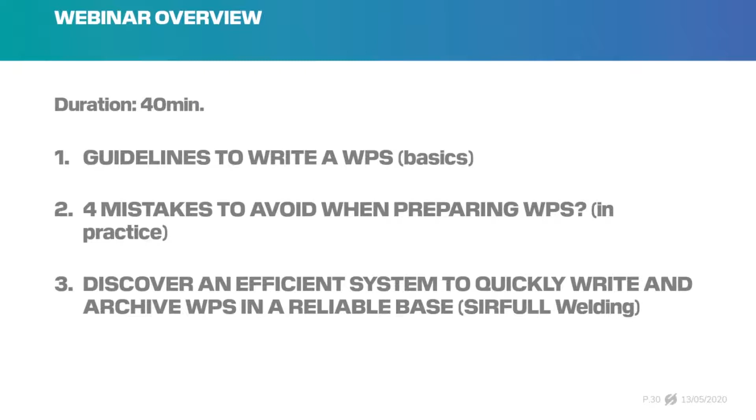Okay, we've got a plan for this webinar. It is divided into 3 parts: you will get guidelines to write your WPS, 4 mistakes to avoid when preparing WPS practice, and finally we will discover an efficient system to quickly write and archive WPS in a reliable base, Sirfull Welding, of course. Finally, on the same page, let's go.

So, just checking if everyone is here. Okay.

Firstly, not everyone in the assembly has the same level of knowledge of the subject, so I prefer to cover a few basics. A WPS is a welding procedure specification, and it is the formal written document describing welding procedures, which provides direction to the welder or welding operators for making sound and quality production welds as per code requirements. The purpose of the document is to guide welders to the accepted procedures so that repeatable and trusted welding techniques are used.

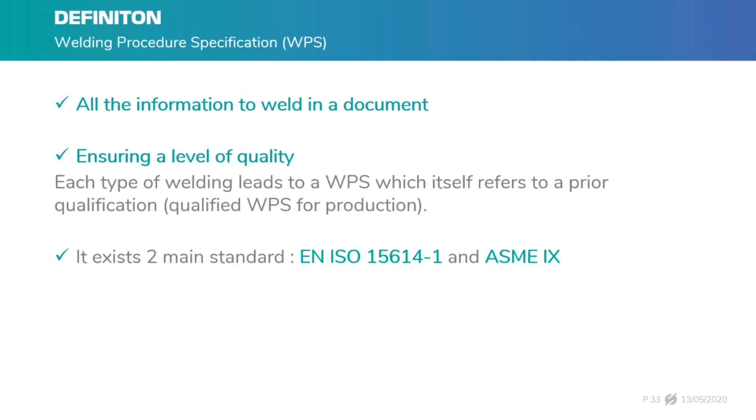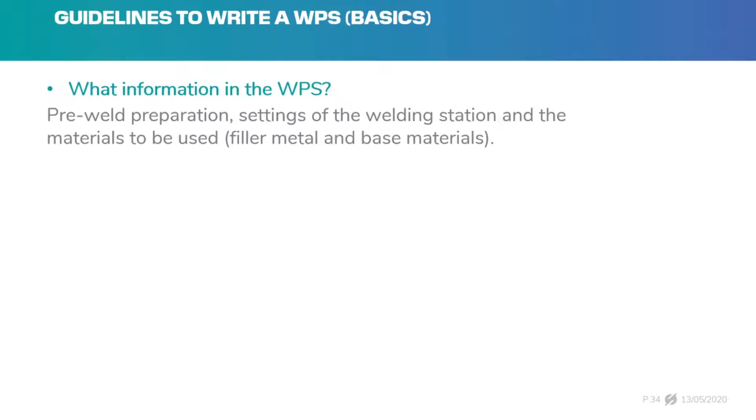There exist two main norms, the EN ISO for the European system and ASME 9 for the American one. I think a lot of people in the room know that. The WPS is a guiding document for the welding coordinator, the welder and inspector during the execution and follow-up of the welding joints. And of course, the WPS is a mandatory document and must be present during a welding procedure qualification and welding personnel qualification. So that's the basics.

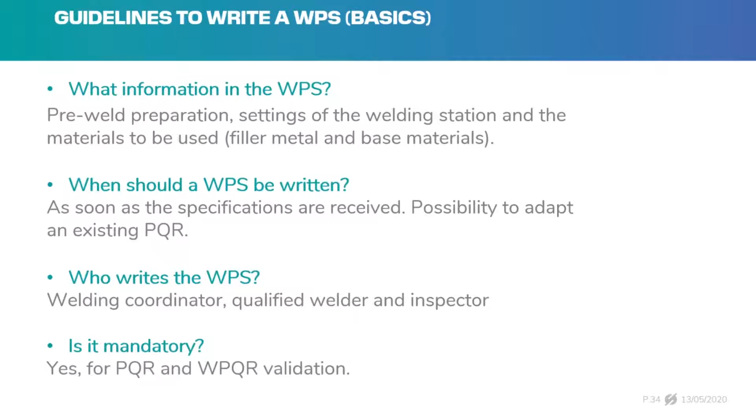You can reread these guidelines when I send you the presentation by email. And when we speak about WPS, it's really important to know the difference between a WPS and a PWPS. So what are we talking about?

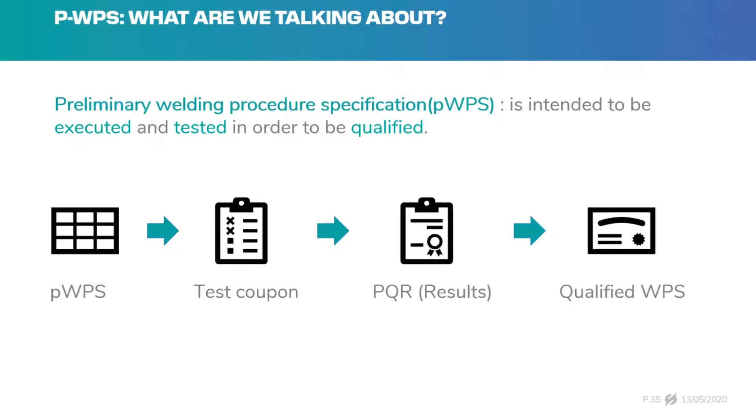The PWPS is a supporting document that endorses the actual PQR, which is the procedure qualification record, the official PQR, lab test report, NDT report, and the official WPS. Because in PWPS, the P is for preliminary. So the PWPS serves as the basis for a PQR required for the certification of a WPS through an inspection body. I know there are some differences between the European and American systems when it comes to interventions of certification bodies, but we will not cover this part in this webinar. The thing is, I just want to tell you the difference between PWPS, WPS, PQR, and what's going on between them.

And for those in the room that don't know what a PQR is for the moment, this is the official document coming from the official form as presented in ASME 9. Okay, we are still together. Okay, I can continue.

So on the screen, I will project all the steps to prepare a PWPS and PQR. After that, we will be able to identify what's going wrong around WPS edition, writing, and welding reporting, and what an automated system can do for you. But first, all we need to identify is the welding process which is to be used.

First of all, we need to identify the welding process which is to be used. This is the first part before writing a PWPS. Welding processes include SMAW or GMAW, GTAW, etc. And once the welding process is decided, then we need to see the corresponding table.

That table is QW252 and QW269 for the complete list of variables. With the help of the table, we can list out all the necessary variables to be used in our WPS. Once we have the minimum variables - essential, non-essential, and supplementary variables, these are terms we find in ASME 9, but not in EN ISO 15614.

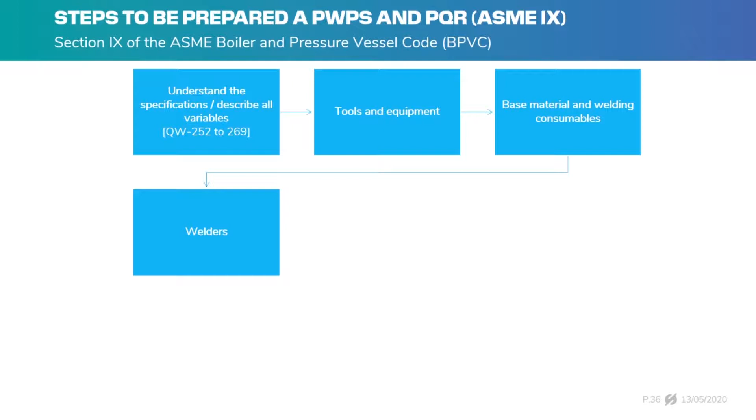Once the minimum variables are decided, a preliminary WPS is prepared. Just give me a few seconds... Okay, everything is on your screen right now.

Based on the proposed WPS, a test coupon is prepared and welded as per the values provided in the PWPS. All the real-time data are recorded. After successful welding, the test coupon is subject to destructive tests.

If the test coupon meets the minimum code requirement, the same PWPS is finalized and approved for further job. In case of any change, the same procedure is repeated until the test coupon meets the minimum code requirement.

As before, all the real-time data during welding of the test coupon and the destructive test report data is compiled into one document known as the Procedure Qualification Record. After successful preparation of the PQR, the final WPS is prepared and produced to the authorized welding inspector for final approval.

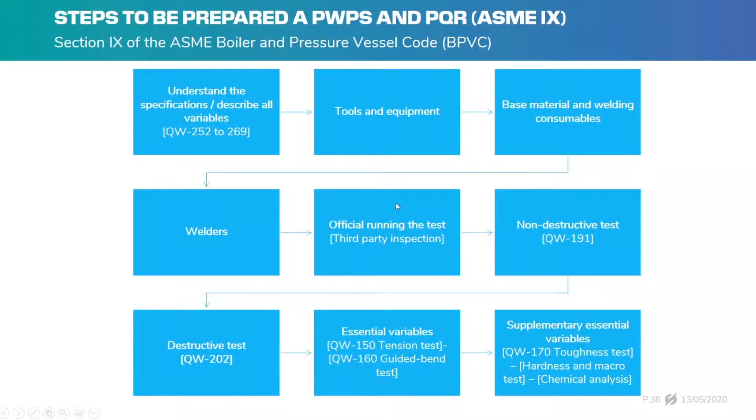And that's how we made a WPS. We don't have time to go more in depth into this, but I think we got the main ideas. This is a form, a WPS.

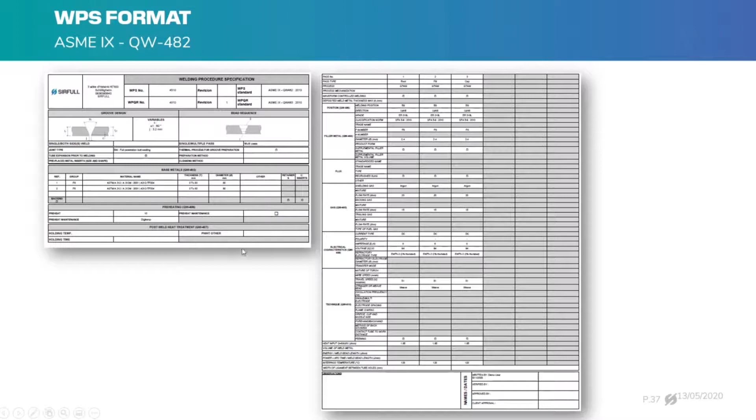This is in ASME 9, created with Sirfull Welding, and this is the official document we've got. But this is all we are going to see for the moment.

Just to finish this first part of the webinar, I'd like to give you a bonus: a very useful link I found on the internet with all the EN ISO WPS format and all the relative norms around WPS.

So if you are not used to the European standard, this document is really useful if you want to know all the norms that gravitate around the WPS.

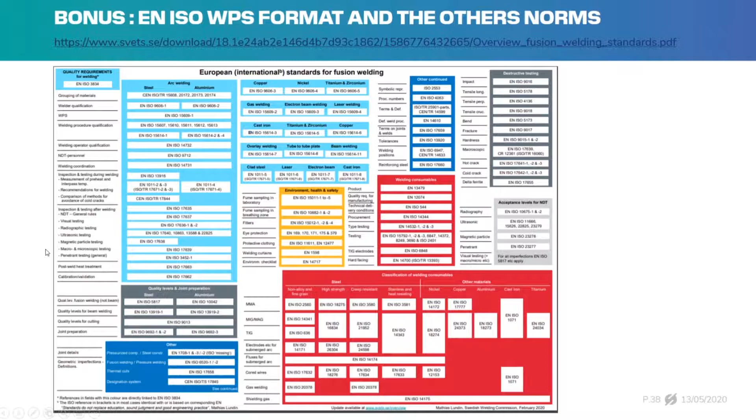So let's go for the next part: 4 mistakes to avoid when preparing WPS, and why it is so difficult for a manufacturer to write WPS. Just give me a few minutes to explain my point.

My point here is to consider the importance of the effort you spend on your thickness range interpretation. The purpose of this task is to exploit the full potential of your qualification, meaning editing the maximum amount of WPS you can with regard to your qualified thickness range.

Let me explain. In the last chapter, we saw together that you, the manufacturer, must follow a clear workflow to obtain a PQR. The variables and tests used for your qualification are recorded on the PQR.

At this point, we have a thickness limit. This means the WPS is qualified for a thickness range, and if we have to weld beyond this thickness range, we need a new WPS and a procedure qualification.

Sometimes there are cases of non-essential variables, and a new WPS can be written freely. So now you can write qualified WPS to support the welds you need to make. The qualified range, or the thickness range, helps you do that.

So let's take an example. From the above example, you can easily find out the thickness range for which a PWPS can be qualified, or a welding engineer can prepare a WPS accordingly.

And this is a thickness qualification table example. And just a remark aside.

Sorry, we got someone else in the room. Sorry, I can continue right now.

So, remark aside: one important point to be noted is that for performance qualification or welder qualification, the thickness considered is that of the deposited weld metal. But in case of procedure qualification, it is the thickness of the test coupon which is considered.

My conclusion is that in practice, this task must be put into perspective with the time constraints encountered by the welding coordinator in the company.

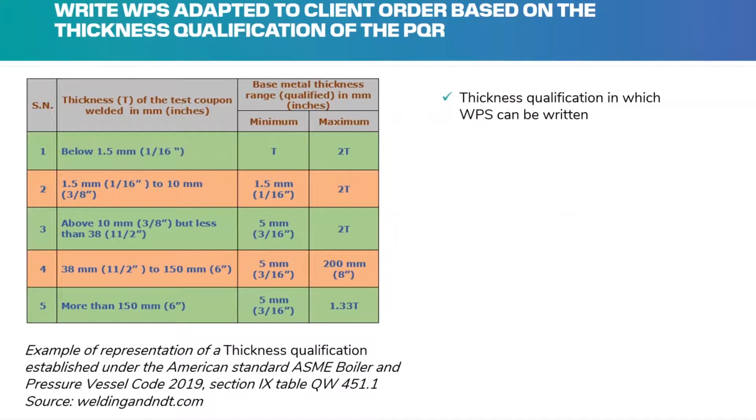What I want to explain is that sometimes the welding engineer or the welding coordinator don't have time to create all this documentation, because you've got a lot of work to do here and here. This type of work cannot be automated, but this part can be automated.

And that leads us to the next part, a really important part of the presentation: right now, at what limits can this process be problematic? I know individual experiences may vary in the management of WPS or welding quality management.

Your WPS can be written with regard to the process type, the assembly type, the position, the grade, group thickness, etc. That is why an internal codification can also be set up to help harmonize your company's WPS library.

Your WPS library is updated as the client orders are received. Go back here, because you need to archive all this documentation, this one, per customer.

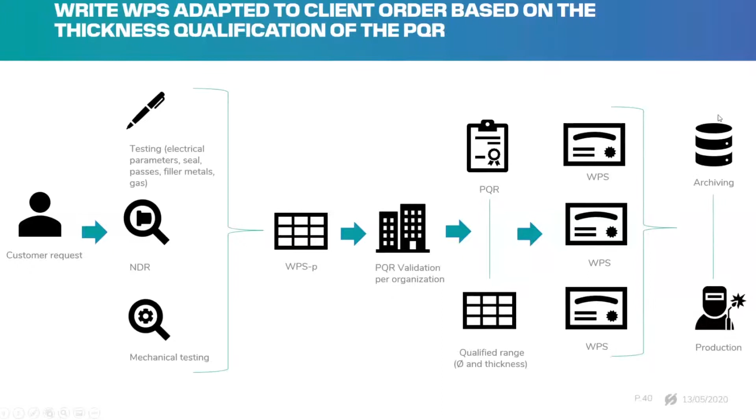The questions that then arise are: what tools will you use to write your WPS? Is it Excel to help interpret the qualified range and edit WPS, or perhaps Word for the layout? Do you intend to systematically fill or manually enter your WPS document, knowing that many WPS cells are redundant, like position, group commercial names, or filler metals denomination? And what will be the WPS reference archive mode you will use?

Paper-based or files on a local server? How will this database be accessible, and who will be able to use and update it? Moreover, how will the updates, verification, and approval of these documents be traced? I think you've got the point here. The challenge is to have an efficient system to quickly find your existing WPS in a reliable database.

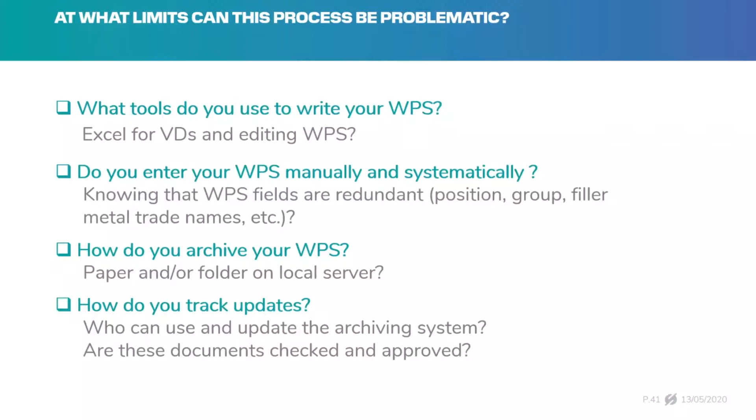So the WPS are only part of the welding reporting, and the complete construction of the welding data book and manufacturer files is complicated. This is just a quick overview of what a coordinator or welding engineer needs to do to compile a manufacturer data book report. WPS and PQR management is just one part. You need to find an equipment plan, do the weld mapping, find all the norms, do the NDT reports, find all the materials and consumable certificates, know the heat treatments, and compile the document.

I just tried to do a quick joke, but it failed just before. How long have you been welding? Ten years. I guess welding quality reporting turned out to be easy for you, right?

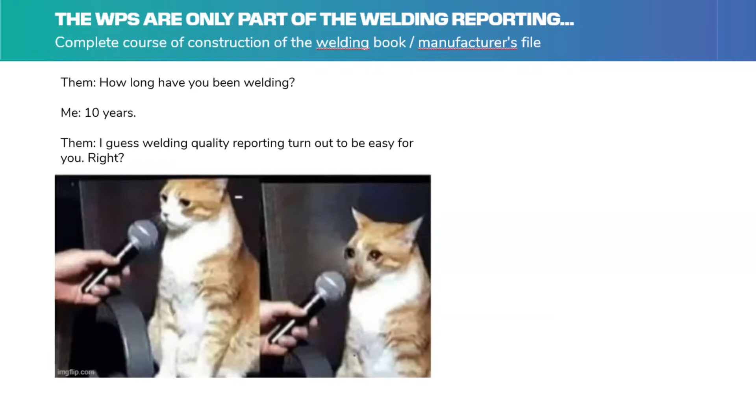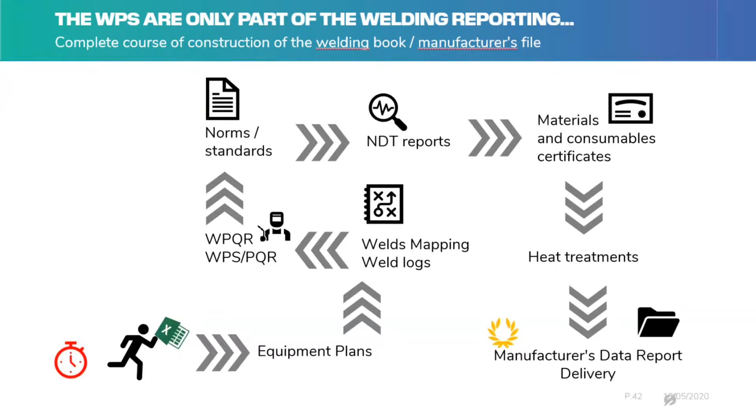What I just want to express with this meme is that it's still complicated in 2022 to deal with welding quality documentation, because it's so difficult to do the main part of the job, like PWPS management, test coupons, etc. So the risk here, my point here, is that there is a stage where you won't go any faster, and the reality of the practice will lead you to regulatory non-compliance, delay, and under-optimized and superfluous PQR.

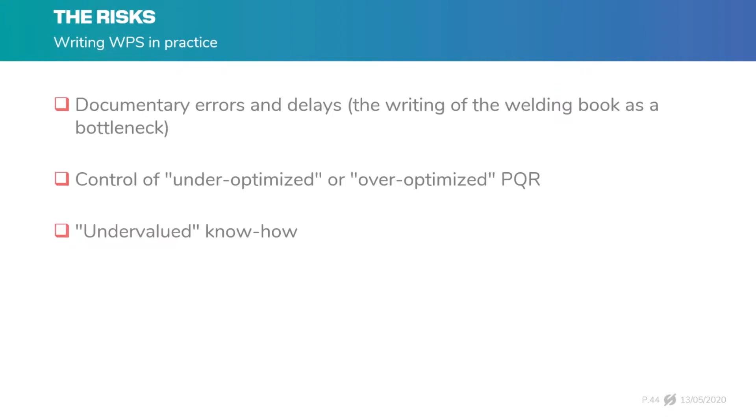At Sirfull, we believe that welding management is far too complex to be left to Excel or a non-centralized system. There is one side of the welding engineer's job that may not be automated or scripted, but there may be another in which it is possible to do so.

We've got new people in the room, so sorry, it interrupted me.

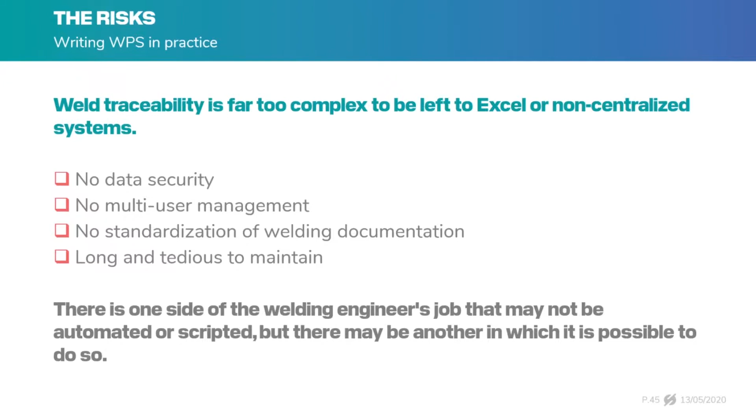Right now, this is the most important part. This is an example of an efficient system for quickly writing and archiving WPS on a reliable basis. A well-functioning system simplifies the writing of your WPS, but also enhances your know-how and saves your time in the document management of welding procedures. A system such as Sirfull Welding allows you to quickly write and archive online WPS in ISO and ASME formats.

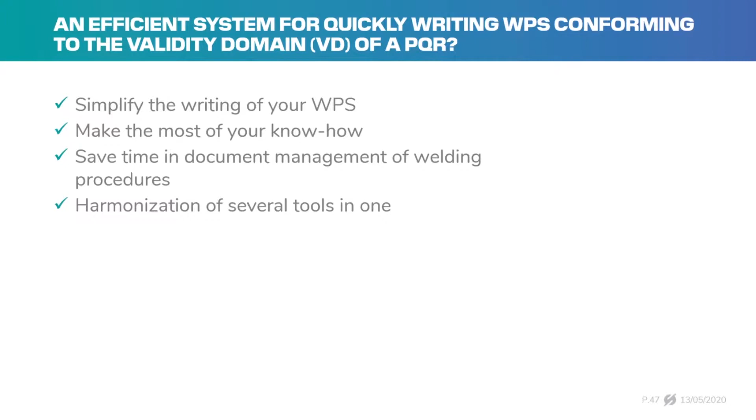I will give you a very fast, quick snippet or video clip of the application, and we will do something related to the topic of this presentation. We will create, edit, and write a WPS together. The features presented will show you how the solution automatically writes and initializes a WPS from a PQR. So let's go.

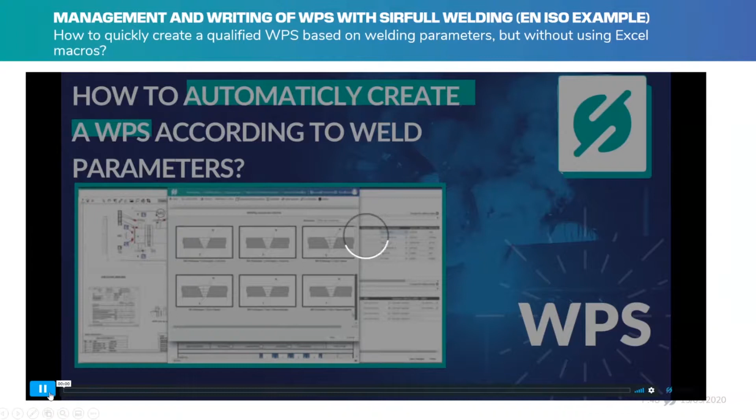This is in EN ISO, but the software can do the same in ASME, of course. Someone is waiting in the room.

Okay, so let's watch the video. This is a capture of the software Sirfull Welding Management.

You've got a feature where you can put the plan, the welding, the plan of the equipment you need to weld. You've got all the components you will join in order to build the equipment here, and here is where you create the welds of the equipment. Of course, these welds are composed of all the components present above.

The purpose of this video is to show you that we can automatically create a new WPS that is qualified and okay with the parameters of the weld.

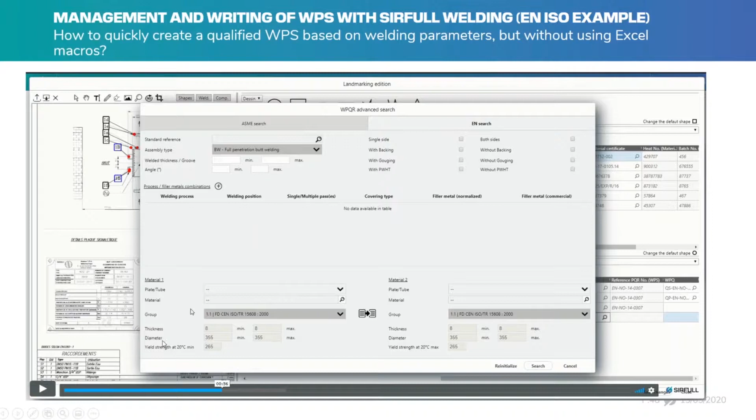And I can see, yes, we've got one PQR with the correct thickness range, or qualified range, or in French, validity range, but you've got the idea.

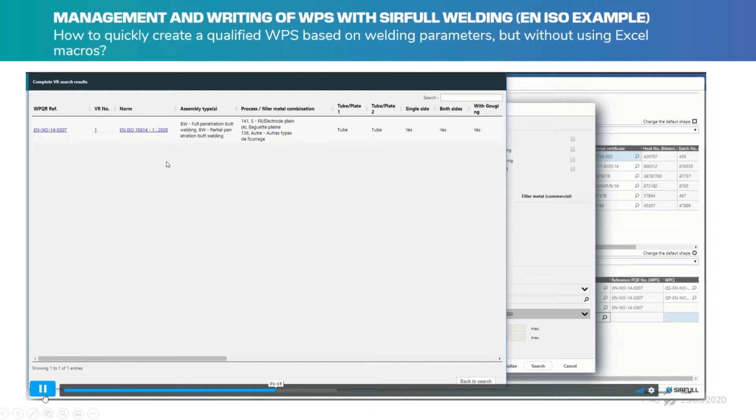I just click on the PQR, and right now I name my next WPS. You can see that the WPS is in correct European standard. A window will open, and in this window we've got a fully complete WPS in the European format, and all the data are coming from the qualified PQR.

The software found it, so you don't need to write this by yourself manually. Everything is automatic. The document is ready to print, but not only printed—you can also put it in a welding data book and manufacturer report.

And you can do the same in ASME 9, of course.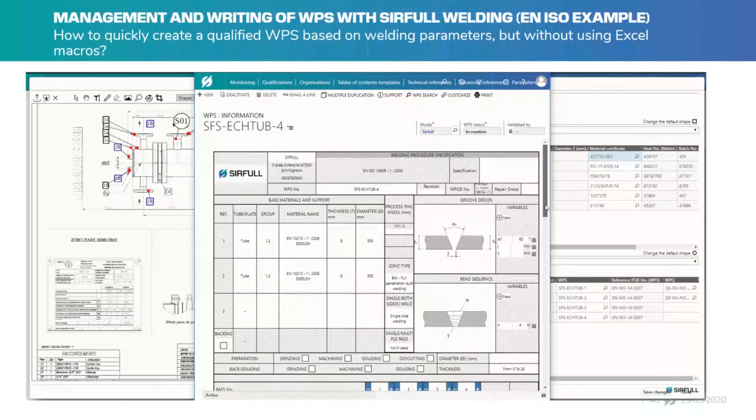So this automatic generation of WPS greatly facilitates the delivery of the welding book or information to your welders, ready to assemble.

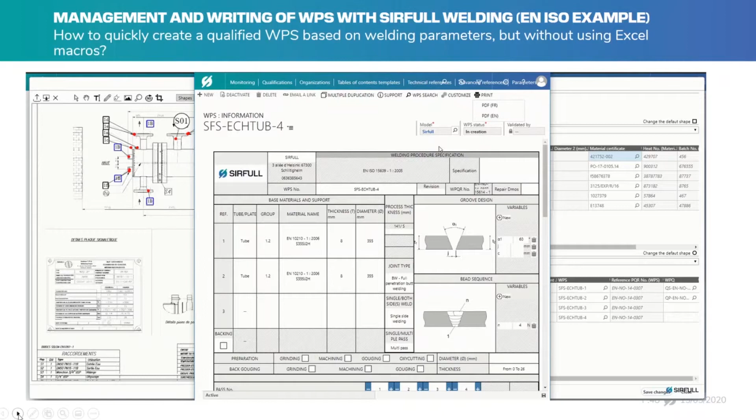As I said before, you can do the same in ASME. I don't have a video for this, but it is exactly the same operation as before. You put the component next to the equipment plan, you create your weld, and you ask the software to find the correct PQR with the correct thickness range according to the weld's parameters. So here it's a V groove and this thickness, and automatically it creates a new WPS.

And yes, of course, this one feature alone can save you a lot of time. And this is not the only feature we've got in Sirfull welding management. We've got plenty of other features you can use, but we don't have time to cover all of them. The point of this webinar is to speak about WPS and what automation we can implement.

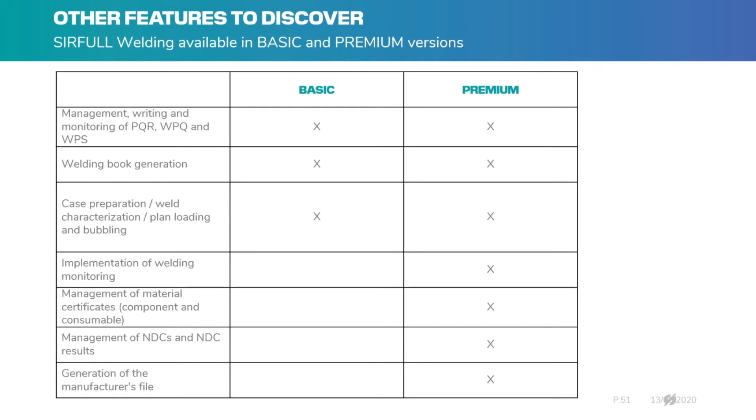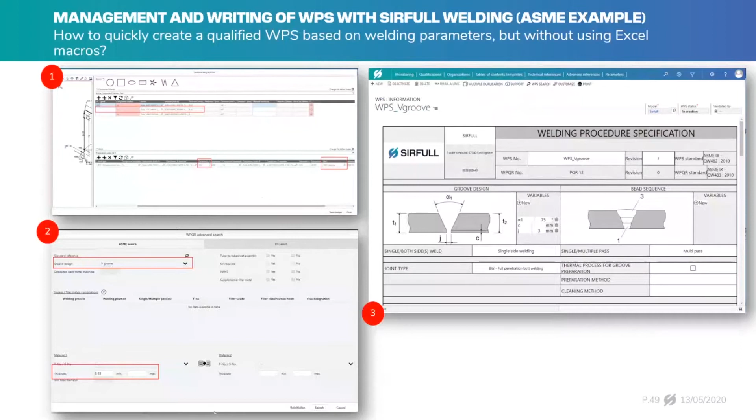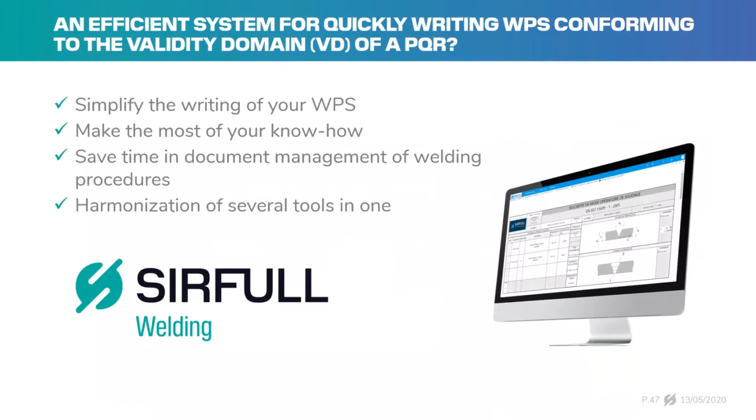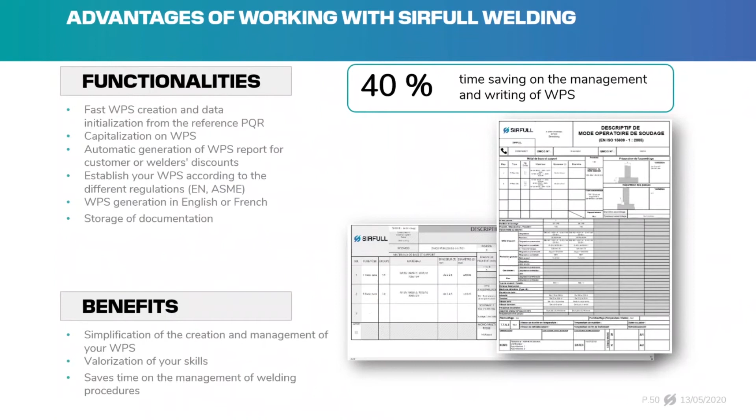So to give you a few reminders of what we saw together: we saw features that can automatically create WPS for a welding project. We saw that it's really important to automate most of the documentation, paper-based parts of welding quality management in your company. We saw together the main task, the most important task, of the coordinator and welding engineer when it comes to WPS writing.

But of course, this is not every part of the welding management job. There is so much to discover or to learn, but this is the subject for today.